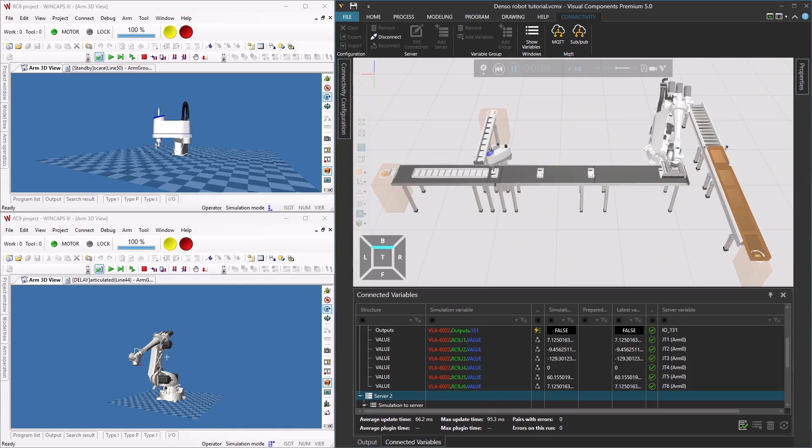For this tutorial, we will enable Visual Components connectivity feature. To enable the feature, go to File, Options, Add-on, and use the toggle switch to enable connectivity. Then click OK below and restart the application.

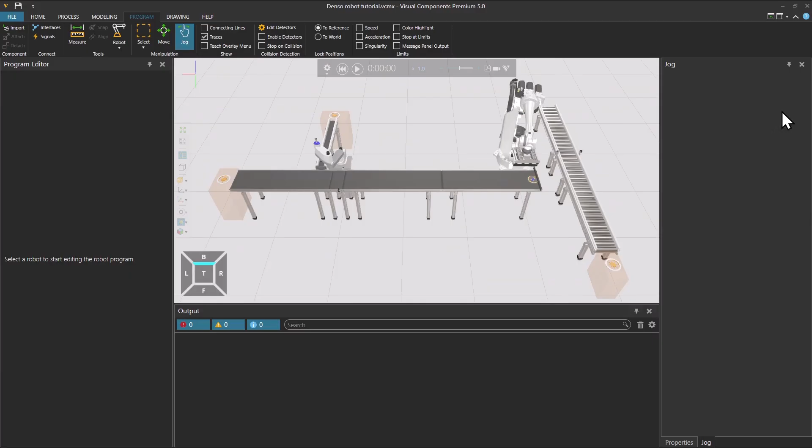For the robot controller, we will use simulation mode in DENSO WINCAPS 3 offline programming software. Any information on where to acquire any additional software components will be included in the video description.

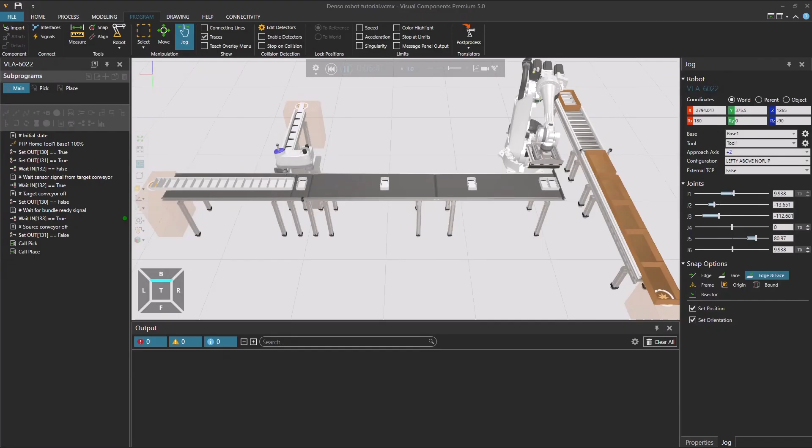We are in the Program tab and we have created a layout to test driving robot joints using connectivity to DENSO robot controllers. The layout includes a SCARA robot LPH060 and an articulated robot VLA6022 from the DENSO collection in eCatalog. The robots are packaging mobile phones.

First, the SCARA robot waits for a sensor signal indicating that the phone box is in the correct position, stops the conveyor, and then waits for another sensor signal indicating that a phone is available. Then the robot picks up one phone and places it in the package.

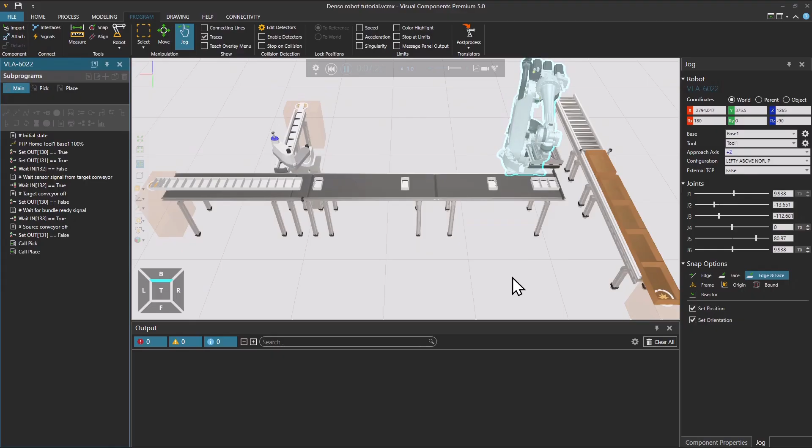In the end of the line, the articulated robot waits for a sensor signal indicating that a larger transport box has arrived to the correct position, stops the conveyor, and then waits for another signal indicating that a bundle of 4 phone packages is available. After that, the robot picks up the 4 phone packages in one motion and places them into the transport box.

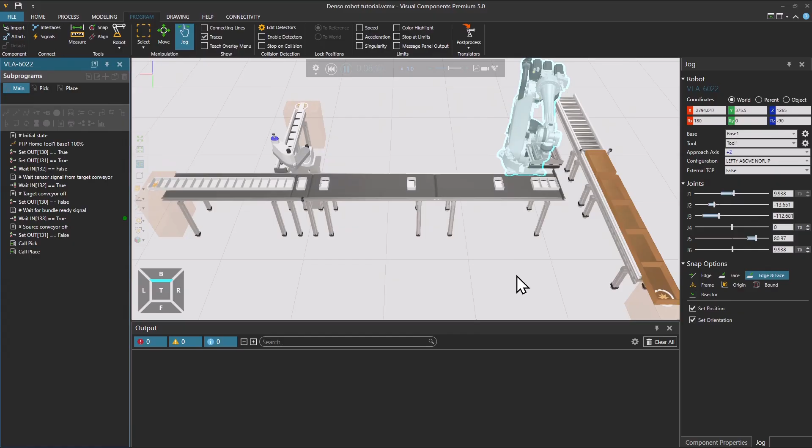All motion statements are set to use a base that is located in the robot's origin. Also, all motion statements are set to use a tool with no offset. Let's open the robot signals editor and examine the signals connected to the robots. For both of the robots, the output signal number 128 has been configured for the grasping and releasing action.

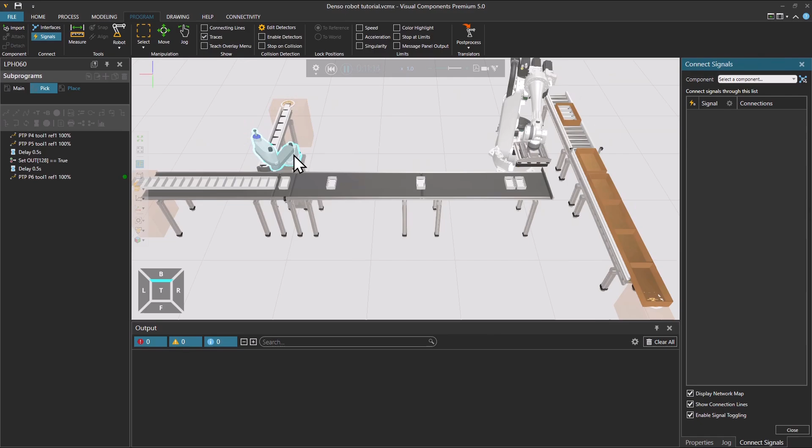In the SCARA robot, the next output signal number 129 is connected to the power on signal of a conveyor. Then, there are 2 Boolean sensor signals connected to input signals 130 and 131.

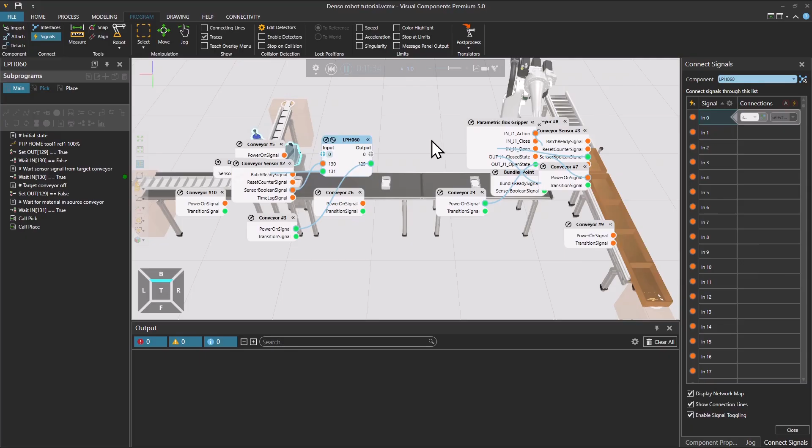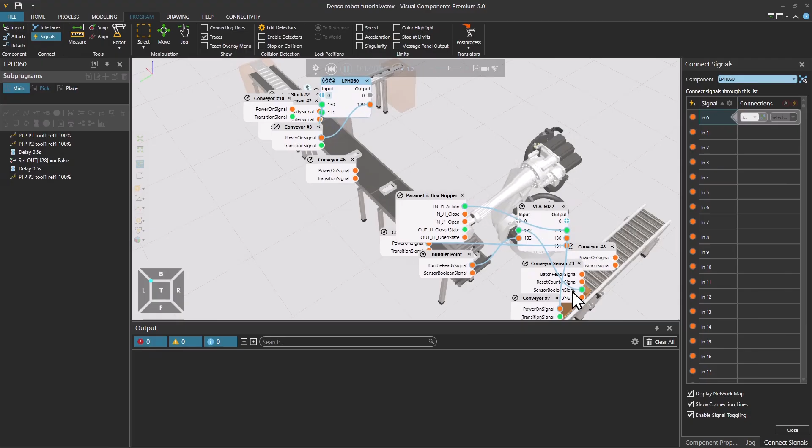For the articulated robot, the output signal 128 is controlling the gripper. Output signals 130 and 131 are connected to the power on signals of both conveyors. Input signal 132 is connected to a Boolean sensor signal, and input signal 133 is connected to the bundle ready signal of the bundler point component.

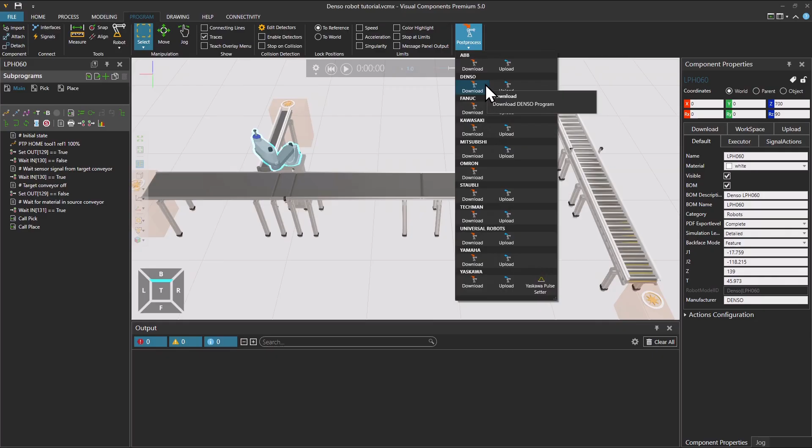Let's then translate the robot programs to the robot controller's native language. Select the SCARA robot. From Translators, click Post-Process, find DENSO, and choose Download. Select a file location for the post-processed program, rename it, and save. Close the File Explorer. Download the program for also the articulated robot.

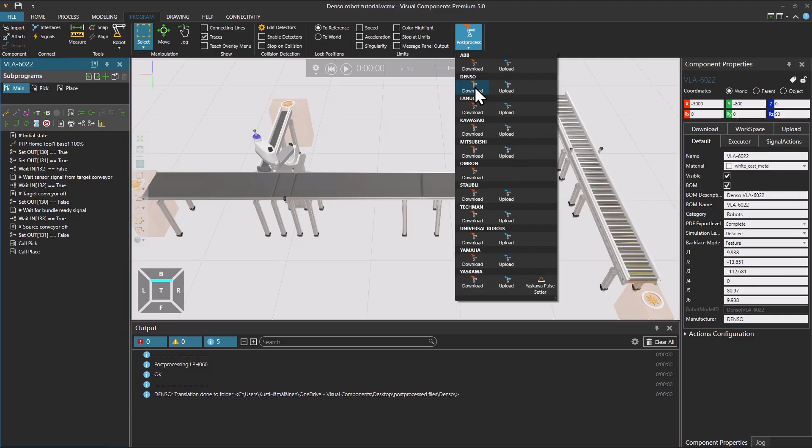We can now open the .pcs files in a text editor and examine the post-processed robot programs. We can see that all of the subsequences, main, pick, and place, were written into one file. Coordinates of all motion points are defined here in the beginning.

Next, disable the robot executors in Visual Components. Go to the component properties of the robots and unselect Is Enabled from the Executor tab. After this, the robot program in Visual Components is no longer executed.

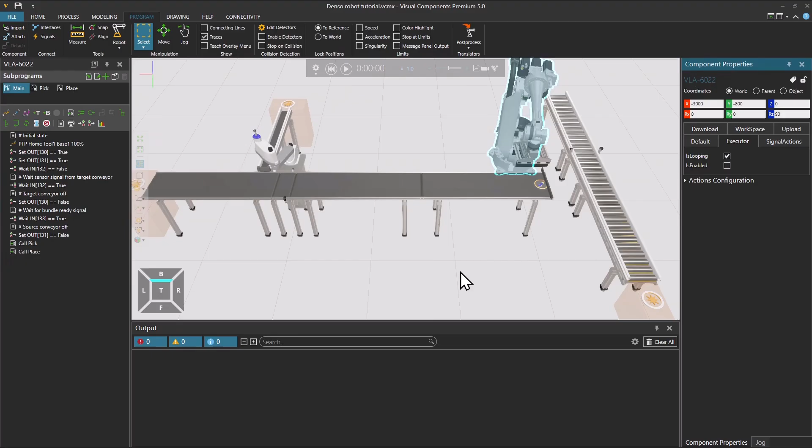Let's then start the WINCAPS 3 offline programming software. Log in and create a new project from the File menu. First, create a project for the SCARA robot. Select robot type manually. Name the project as RC8 project and save it in the default location in Documents folder.

The robot model is found from folder RC8, family LPH, and with name LPH060. Use the default settings for all steps. We can now view the robot by selecting Arm View from View menu.

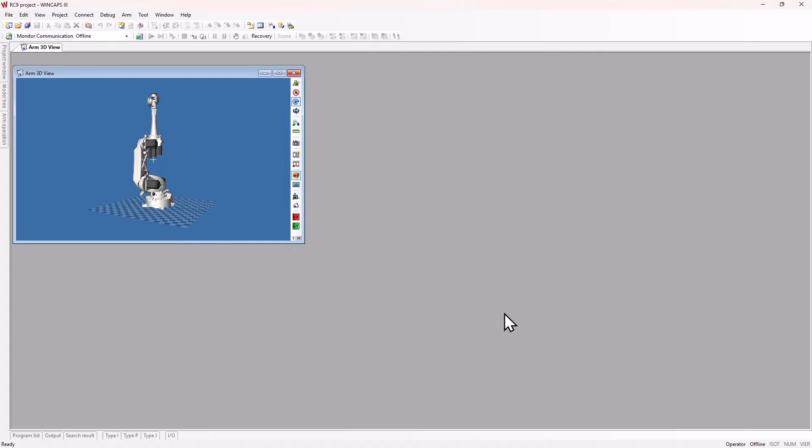Then change to the other instance of WINCAPS 3, go to Project, add existing file, find the post-processed program for the articulated robot, import it, and open it from the program list. Go to the ARM operation panel and set the speed from 10% to 100% for also this robot.

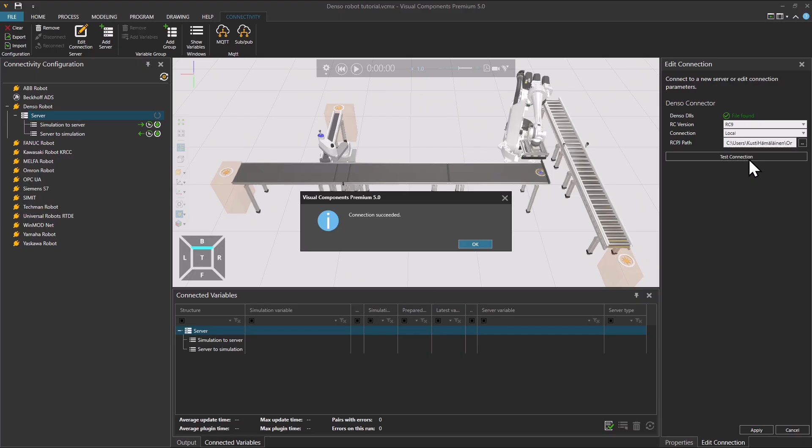Next, we will add a server and connect visual components to the RC9 controller used by the VLA6022 robot. In the Connectivity tab, choose DENSO Robot from the Connectivity Configuration panel and click Add Server. Choose RC9 for the robot controller version, use local connection, and find the RCPJ file of our RC9 project. Test connection, verify that the connection was successful, and press Apply.

Let's then add another server and connect visual components to the RC8 controller used by the LPH060 robot. With an RC8 connection, we need to start a program called bCap Listener. This step is required only for RC8 connections. Find the executable file for bCap Listener from the installation location of ORIN2. You could pause this video now to locate the program.

Start the bCap Listener.exe by double-clicking it. A window opens. Minimize but don't close it. Go back to Visual Components, find the file path for the project file, test connection, verify that it was successful, and press Apply.

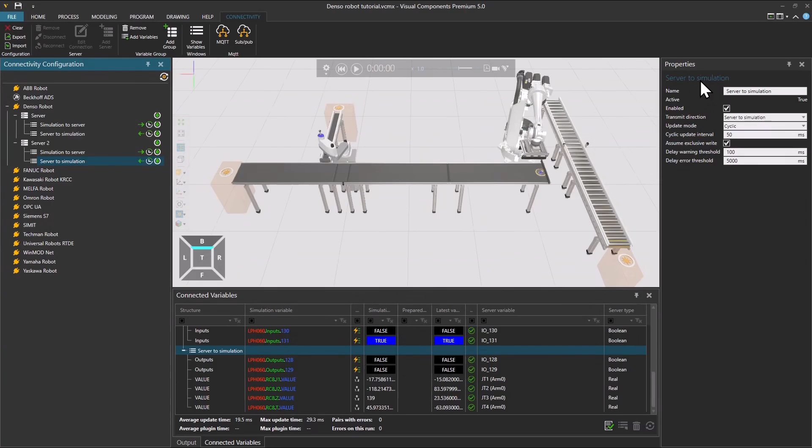Close the variable pairing editor. Let's next rearrange the windows to show the WINCAPS 3 instances and Visual Components side by side. Unpin the panels in Visual Components to make more space. We can now test the connection for the joint values.

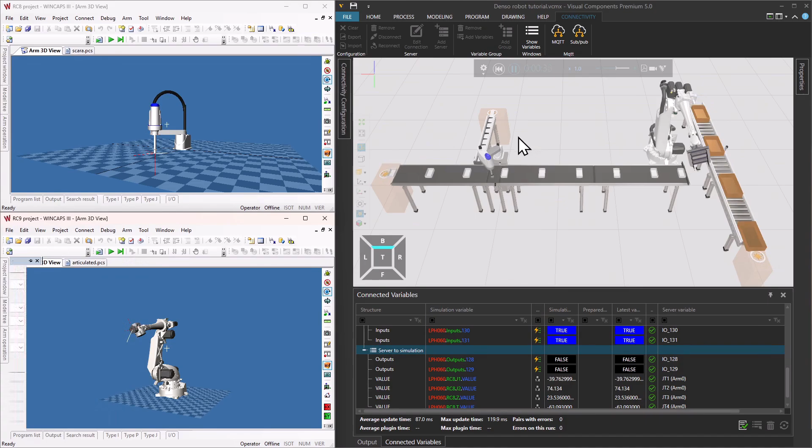Run the simulation in Visual Components, go to WINCAPS 3 and jog the robot's joints using the sliders in arm operation. We can see that both of the robots in Visual Components follow the joint positions successfully. Reset the simulation.

Next, we will run the robot programs in the robot controller. Enable the simulation mode for the LPH060 by pressing the simulation mode button. Select the program and run it by pressing the play button. Choose Program Run mode continuously, so the program will repeat.

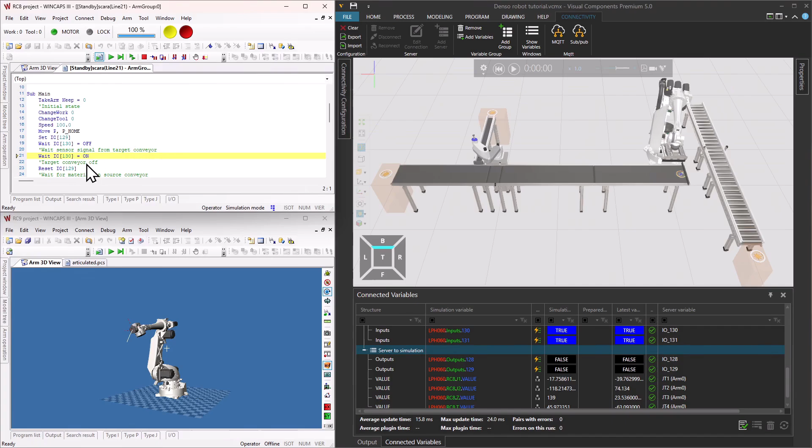The program drives the robot into the first motion point and goes to standby mode while waiting for an input signal.

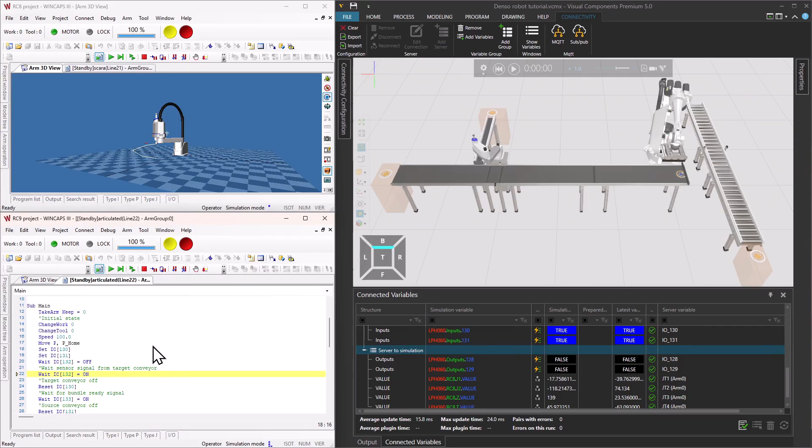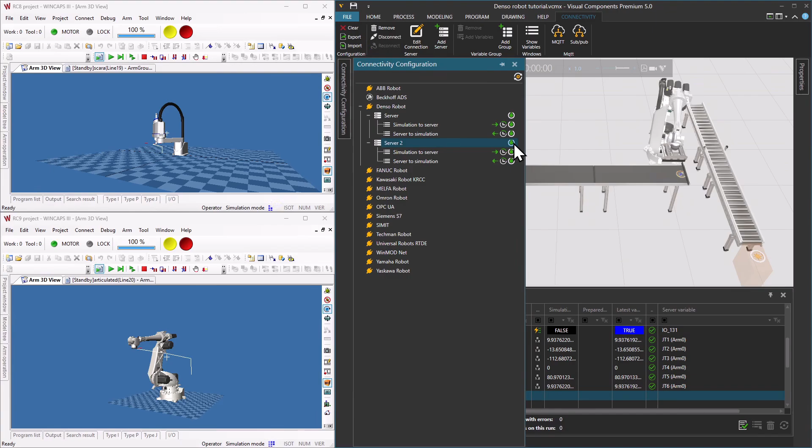As a final touch, let's open the connectivity configuration panel and toggle the RC8 connection off and back on. This is required because we changed the controller into simulation mode after connecting for the first time. Finally, we can run the simulation with robot joints driven by the robot controllers. Run the simulation in Visual Components and watch as the boxes are packaged.